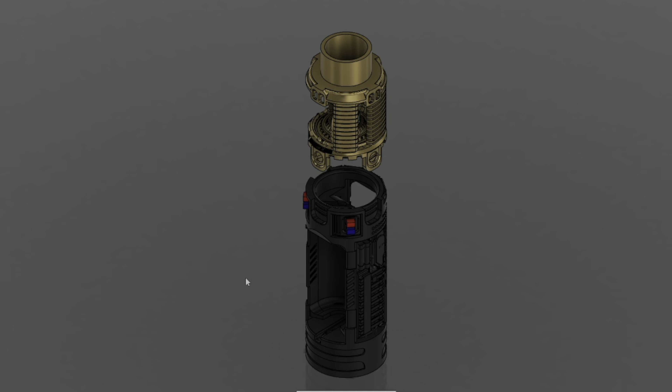Okay, so here it is. Short but sweet, right? So this particular speeder hilt, not that it had limited space in the grip. However, because I wanted to get a crystal reveal in this, the compromise that I had to make, obviously, was to step down the battery size. So this is an 18350 battery build, with a full brass crystal chamber up top.

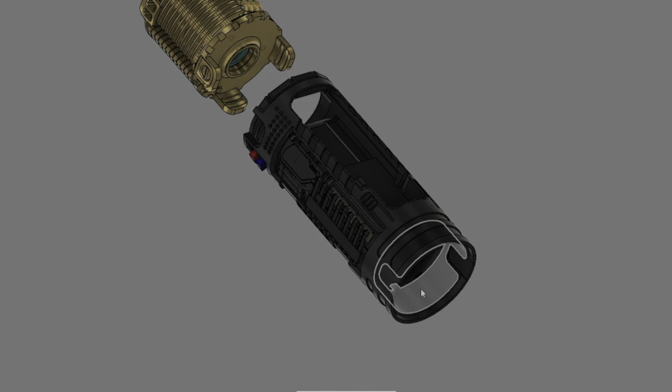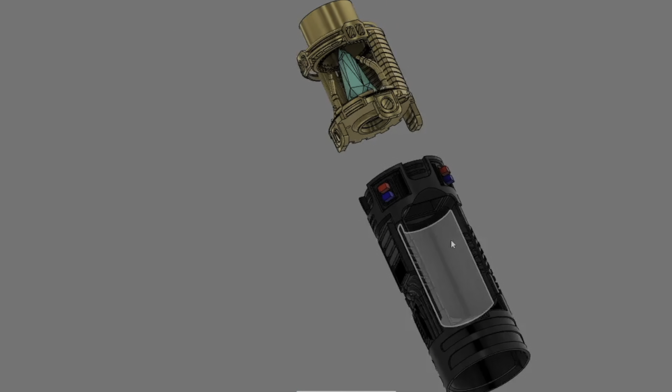So let's start at the bottom. Plenty of room in this particular build to get a fully enclosed 28mm speaker. This is a Darkside Elite speaker from Smuggler's Outpost. All right, here is where our Proffie board will live. The Proffie board does sit in this tray, and then it will pull forward and tuck up underneath these forks. So those forks just help it to stay secure. I do have some rectangular red and blue LEDs serving as accents on this main chassis as well. And then, of course, our battery tray is here. All right. Making our way up.

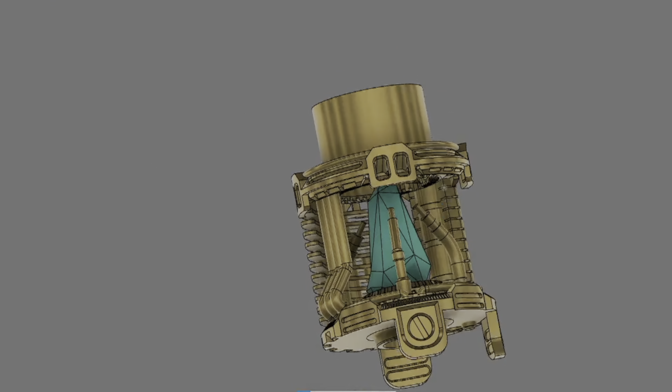So here is the crystal chamber. I mean, I didn't switch up my design aesthetic too much. I did just switch up some things, right? But I am happy with the amount of detail that I was able to pack into this crystal chamber. This is a relatively short crystal chamber, right? Okay, so we have a full quartz point in this crystal chamber. That is lit from below with one single neopixel.

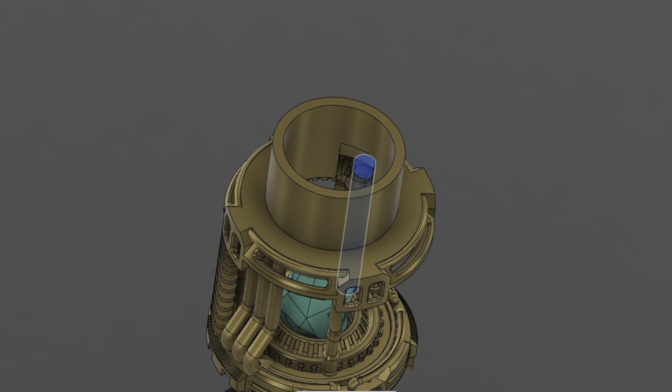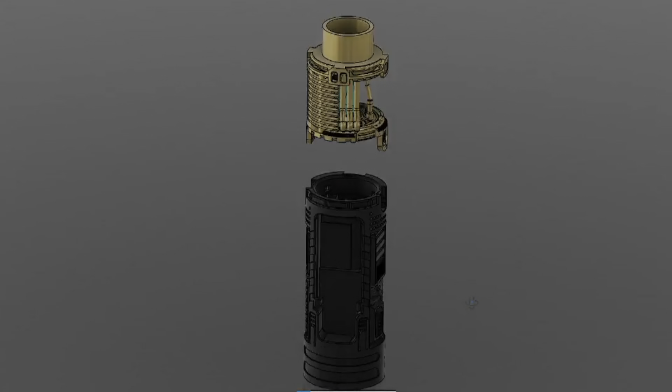This is my battery. This is my wire channel that is kind of hidden behind this post here, and that comes all the way up, and this is where I bring my leads up for my switches, for my kill switch, and for my emitter. So one of the cool things about this hilt design is that Jeremy put an indentation or a cavity in the emitter section of this hilt for a kill switch. I believe the customer did specifically ask for a kill switch spot in this hilt. So that is why you do not see a kill switch in this chassis. And that is actually a good thing because there would have been no room for a kill switch down here anyway, right? But we do have an external kill switch in the emitter section of this hilt.

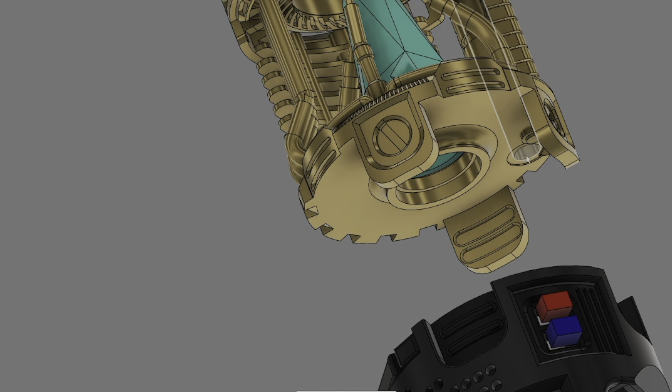So I had to bring a lot of leads up through this wire channel, and this was super tight. In hindsight, I probably should have stepped this up to like 4.5 millimeters. Typically for my wire passages in these chambers, I do like a 3mm tube. I should have stepped that up a little bit because it was pretty tight. And I don't like pulling wires past like a 45-degree angle like this all the time because there's a risk of nicking the insulation and all that. So it was a super tight build, but I got everything up past that area and we were good to go, right?

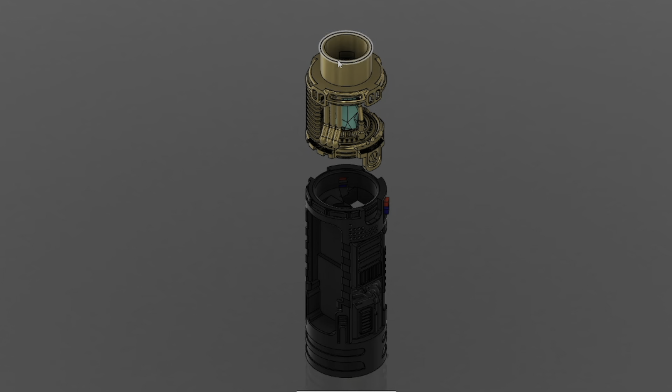So this nipple is what I secure to the upper part of the hilt, and there are plenty of M3 or M4 set screws that secure that chassis in place. And that is it. Really short but sweet chassis and build. I'm really happy with this one. All right, so let's come up top.

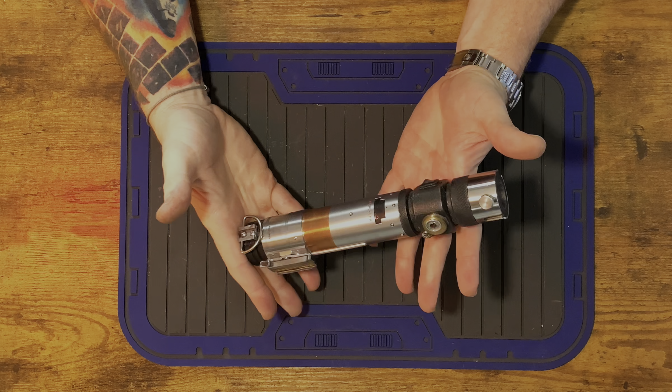Okay, so here it is. This is the Canon Y, or one iteration of the Canon Y speeder from Jeremy at Solo Sabers. So we have seen a couple of these come out of Jeremy's shop, and they are fantastic, right? I love the fact that each one of these is unique.

I myself have one as well, right? But I really love the short but sweet speeder hilts that Jeremy is doing from Canon Y parts. This one is super unique, right? I don't know where these parts came from. This pommel, I mean, Jeremy might have machined all this stuff in-house.

I know he's knurling now. I know he's threading stuff. So I'm not sure where this upper section or this lower section came from, but I do know, obviously, that this is a Canon Y flash gun tube or cell holder. And then, of course, we've got our quintessential Canon Y flash mount here, or switch box, which is great.

I love these. And then, of course, all of the regular Canon Y stuff is still on here, right? So I love that the red button is still here. This is not functional, it's just decorative, which I love. Just a great looking hilt. Here is that external kill switch.

I did have to make a special custom holder for this. I like using these kills on external builds. I put these on the null revs. I just like the way they feel. So I just made a simple holder out of PLA for that kill switch, and that is just E6000 into that cavity that was there made by Jeremy. And then our switches are here, and that's it. Just a great looking hilt.